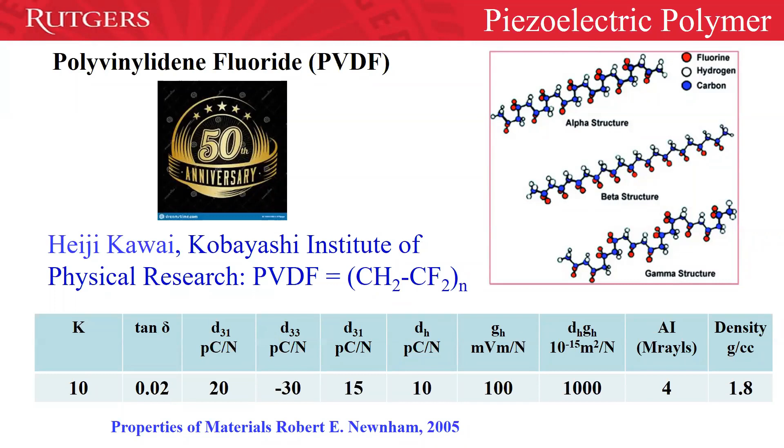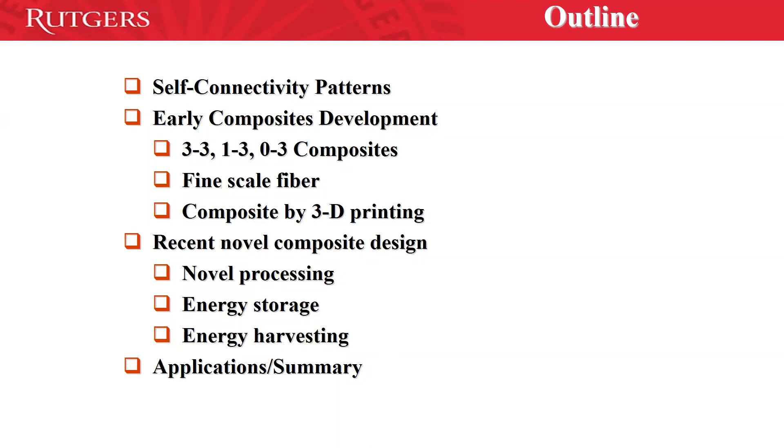I will talk a little bit about the early 3-3, 1-3, 0-3 connectivity composites, then move to the fine scale fiber composites. Then I'll touch on different 3D printing processes worked on for piezoelectric composites. And recently, composites became a major focal point for many applications including energy storage, energy harvesting, and capacitors, with a lot of novel processing now making composites.

First, I would like to acknowledge Professor Newnham and Professor Cross, as well as Professor Walter Schultz, and their leadership on piezoelectric composites, idea, and connectivity patterns. Walter Schultz is an ongoing collaborator with us doing characterization, setting up all the hydrostatic measurement and piezoelectric coefficient evaluation.

I would also like to acknowledge Dr. Robert Pohanka and Dr. Wally Smith of ONR. Probably Bob Pohanka is not there anymore. They not only supported Penn State MRL ferroelectrics for many years, from composites to single crystals, but also supported people like me and many other colleagues, not only in the US but also in other parts of the world, on development of piezoelectric ceramic polymer composites and single crystals.

It is noticeable to acknowledge the contribution of Professor Kiyoshi Okazaki from Japan. He and Professor Cross did a tremendous job organizing the US-Japan dielectric and ferroelectric meeting, which is still going on every other year, and is only by invitation.

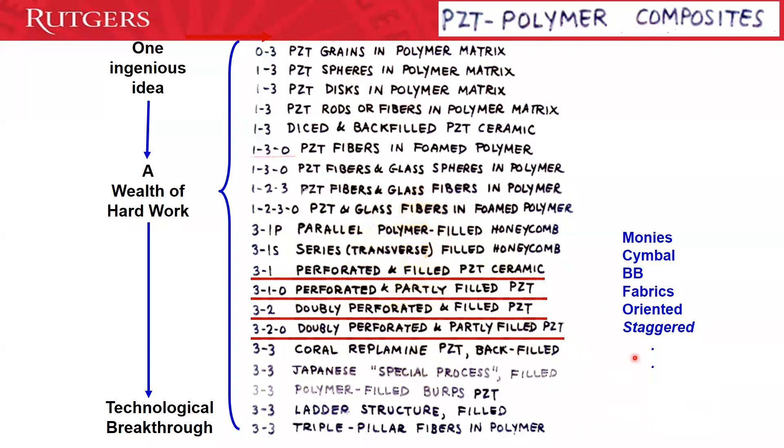These are the old composites. Later it comes to moonies and then cymbals and so on, which I'll touch on some of these very briefly. This is a schematic drawing of many composites developed around the world, and this is from one of my review articles.

So here is the PVDF - we call PVDF a composite as well. And then here is the 0-3 composite. The lower part composite you see here is developed by what we called at that time layered manufacturing or solid freeform fabrication. Now we call it 3D printing.

Let me just historically, for the importance of this type of composites, start with 0-3 composites. After Kawai's development of PVDF polymer, there were a couple of activities on making composite in Japan based on the PVDF. But the main point came from Harrison at Honeywell on making PZT polymer composites.

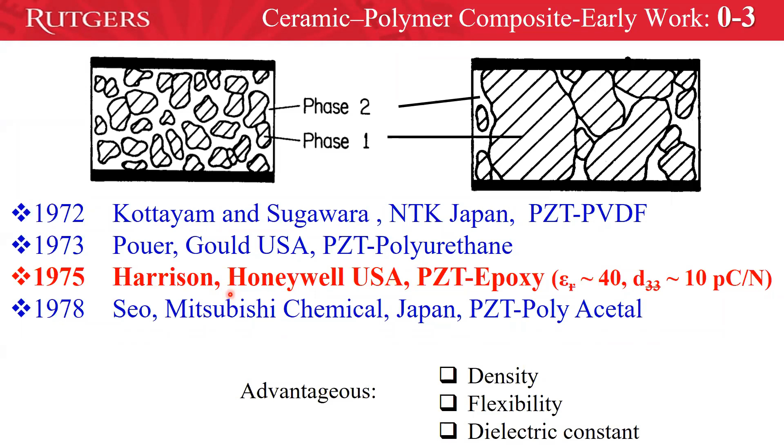These composites showed decent properties, but it became really a major point for moving the piezoelectric composite research at Penn State. I remember very well Harrison, when he was a part of the industrial representative to ferroelectric at MRL. He was a very well distinguished individual and knowledgeable.

So from there, I am going to show a little bit busy overheads, but historically, this is the first composite reported at Penn State. It's called replamine form, or replication process. This is Doyle Skinner's work. He started about maybe '76 and finished thesis in '79 or '78.

But my memory says that he defended his thesis, but he never submitted his graduation. And so he stayed like that, working in a major lab in the Columbus area.

Tom Shrout and Rittenmyer came with another composite called BURPS, burning plastic spheres, that's the abbreviation. Then a couple of 3-3 composites from Japan, porous or ladders. And then most of our reliable results came from evaluation of these composites at Orlando Navy Lab by Dr. Robert Ting.

He was a very nice, knowledgeable person. He evaluated most of the composites, collaborating with Penn State as well as supported by ONR. So this is a typical Gh coefficient of the 3,3 composite versus pressure.

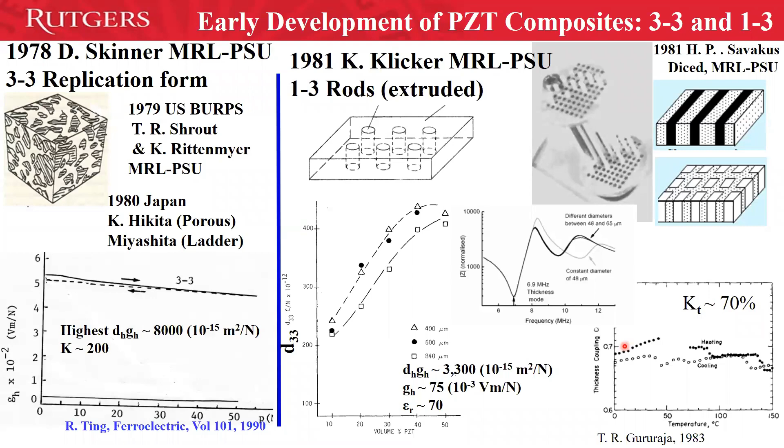This is my graduate work. When I started doing research with Professor Newnham, who was an outstanding scientist, researcher, leader, idea maker, and advisor, he handed out a paper to me and said, make a PZT sphere.

And then from this PZT sphere, make a composite, and let's see how the property looks like. The result came out very useful. We published a paper, but it wasn't that I was looking for something dramatic. So I was always thinking, okay, how can I make the inverse of the PZT sphere?

And so I came up with this type of composite. This is the patent - I believe this is the second patent for the Ferroelectric Group at MRL. The first one was the 1,3 composite by Klicker. And so this one is called perforated.

We can have this one in 1,3, 2,2, or 3,1, 3,2 connectivity. Less pressure sensitive, but very high DH and very high GH - the product of DH times GH is 15,000. This is the overhead Professor Newnham presented at the 1983 ONR review meeting of the program.

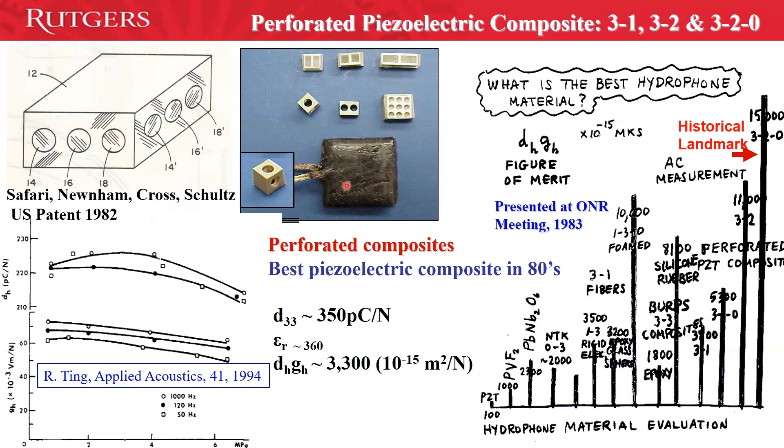And so for a time, we were proud that we had an outstanding composite. This is nine elements packed together by Celanese Incorporated, New Jersey at that time, Morristown, New Jersey, based on these 3,2 composites.

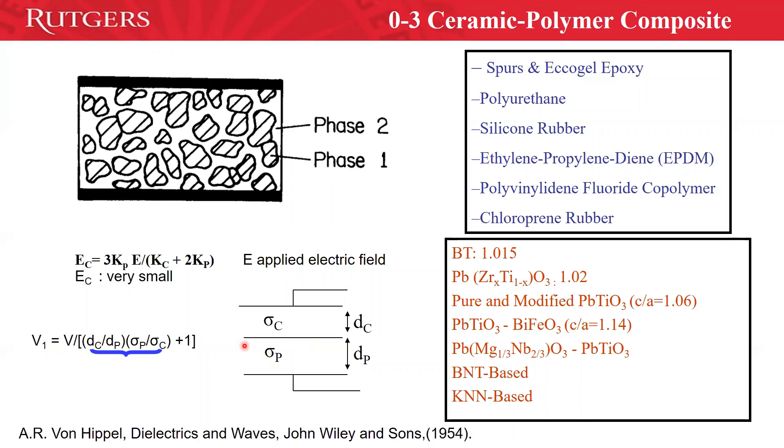So in 1982, Hiroshi Banno put a bombshell in the community. He introduced several different types of composites. These composites are 0-3 composites made by lead titanate particles. We believe he made them by chemical processing with controlled particle size, and sometimes in the composite he mixed different particle sizes. Finally, he announced a composite with d times g in the range between 2,500 to even 3,000 or more.

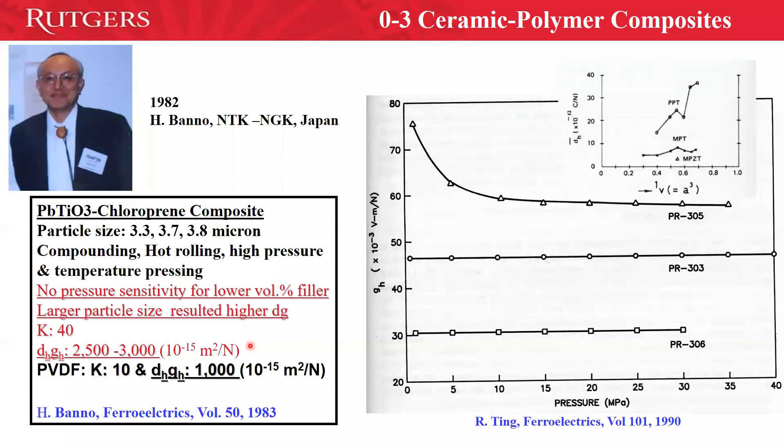That was really a breakthrough, comparing with the old 0-3 composite of PZT polymer, or even comparing with the PVDF properties. So from that time, the majority of the effort at Penn State was on making 0-3 composites. What you see here is a list of many 0-3 composites made by different individuals with different filler material, different powder, and different ceramic processing.

I believe the most significant here is starting to use lead titanate bismuth ferrite. Jenny Giniewicz, the late Jenny Giniewicz, very young and nice lady, died early. She was a professor at Indiana University of Pennsylvania, and she worked on this composition. I should say I had involvement in all these composites, either when I was at Penn State or later leading at Rutgers University.

The second composite, which three of us, Gururaja, Arvind Halliyal, and myself, developed during our postdoctoral research period, was PZN-PT ceramic, PZN-PT single crystal particle in the polymer composite. This composite gave properties similar to the single crystal.

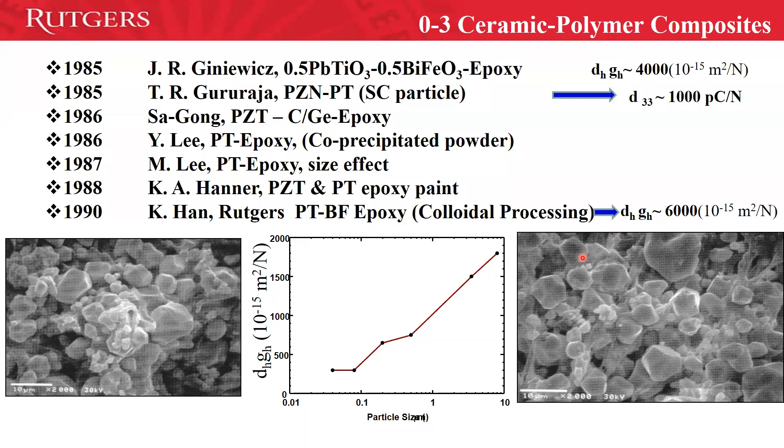So let's look at 2-2 composites. Again, I wondered why Penn State didn't apply for a patent on that one. So we got a special patent on making 2-2 composites by lamination of the tape, and we made either 2-2 or 2-0-2 composites, as well as 1-2, 1-3, 1-0-3 composites.

We utilized meters of these composites in the road, at a corner of the road at Rutgers University, as a weigh-in-motion sensor, working with faculty from civil engineering. We looked at the loading and unloading response as a vehicle was arriving, and wanted to see how these composites responded. The composites responded positively, with a little delayed response, but followed the load and unload cycle, and the voltage sensitivity was really good at that time. This was a candidate replacement for fiber optic sensors for weigh-in-motion.

In the early or late '80s, Plessey came out with a composite, and this was very interesting also. The result I am showing here is from Bob Ting, and this composite was a very large area panel. We believe this was diced, either 1-3, probably, or 2-3, or 2-2, and the d times g of these composites was about 20,000.

For about a decade at Rutgers University, graduating maybe 5 or 6 graduate students, we worked on fine scale fiber composite. This area became very interesting because we wanted a smart piezoelectric composite touch sensor, even for keyboards. ONR supported this work as well.

First we started making this by a relic process, taking a fabric—this could be carbon fabric or cotton fabric—and then immersing it in a sol-gel solution of PZT. After careful drying, we impregnated it with polymer and made a composite. This is really fine scale, and the properties were great.

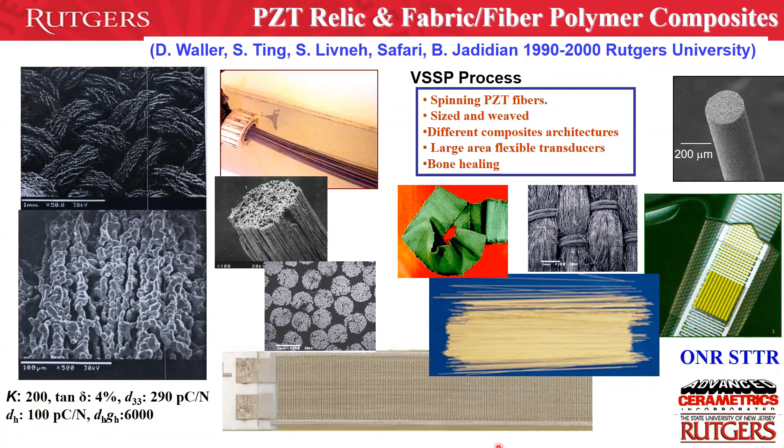Later, ONR helped us put together a STTR proposal with Advanced Cerametrics Incorporated in New Jersey, and we developed PZT fiber continuously by the VSSP process. Later we made a variety of composites based on these fibers, as well as the bimorph, as you see here. That period was very good for PZT fabric composite, resulting in mass production of PZT fiber as well as making these 1-3 type composites as bimorphs for either structural protection or crack investigation.

MSI, the late Les Bowen, my mentor as a postdoc—I was his postdoc—they came up with a variety of designs of PZT ceramic, including the 1-3 tube, and this is part of our work also, made by injection molding. So that was in terms of the composites and fiber.

Then it comes to poling. It was Gururaja who first made continuous poling of these PZT fibers, just taking a single PZT fiber and drawing it between two electrodes in an oil bath to pole them continuously. I looked at the picture—it was not clear enough to put it here, so I wanted to note his work.

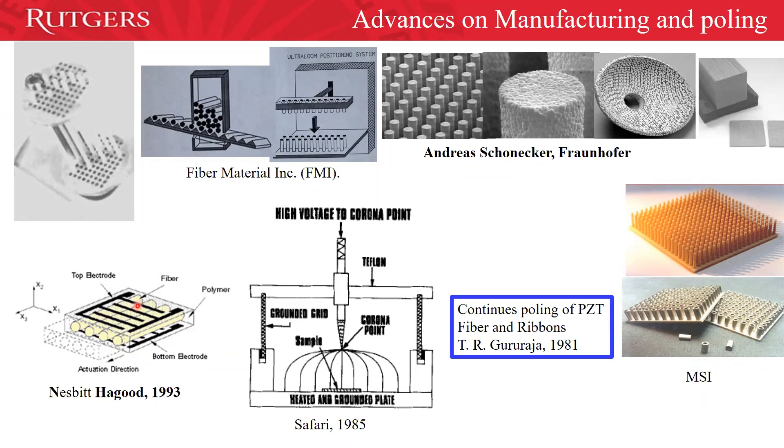So in terms of those, those are low frequency. In terms of high frequency, there is a lot of PZT and recently some other ceramic polymer composites. I am noting a few different contributions. This is from Jinfeng Li and Qifa Zhou—Jinfeng Li from Tsinghua, Qifa from USC. They made KNN-based material by dicing and making composites. This is about a 32 megahertz center frequency, with a very nice bandwidth—about 70% minus 6 dB bandwidth.

Then some other scientists around the world made these composites: KNN-LT ceramic polymer composites, and BNT single crystals and BNT fiber composites, which gave really encouraging results overall for the development of ceramic polymer composites.

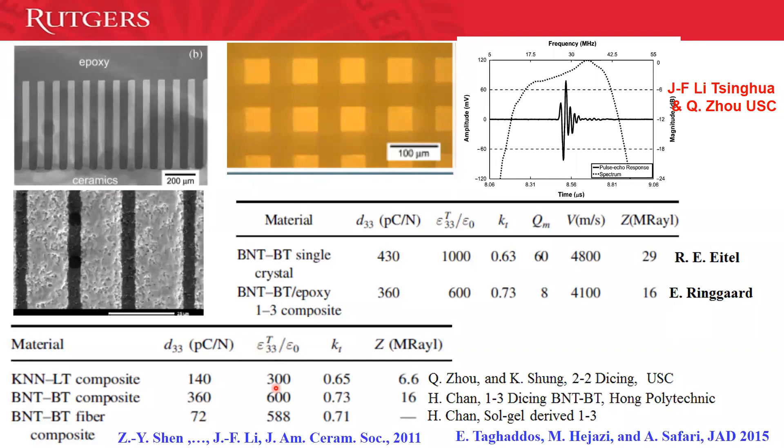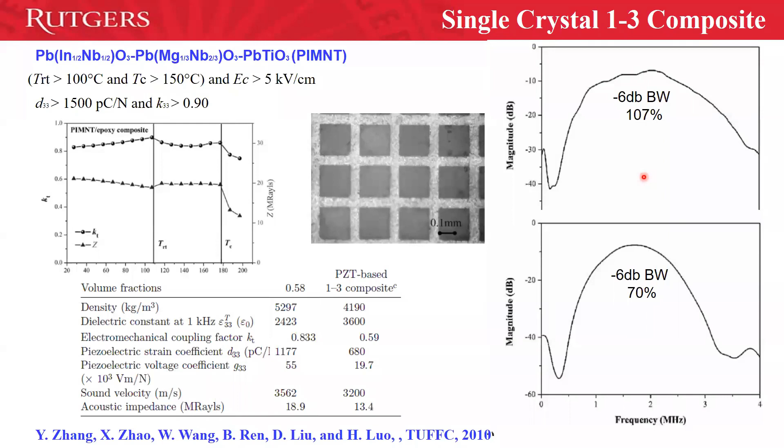This is another work—single crystal made with Haosu Luo and his group, using lead indium niobate, lead magnesium niobate, lead titanate single crystal 1-3 type composites. Here is the single crystal, and these are the polymer. The bandwidth of these composites is about 107—this is minus 6 dB bandwidth. That was another encouragement, really, for using these in medical ultrasound applications.

So for about two decades, we worked on 3D printing at Rutgers. We had a major program supported by DARPA, ONR, New Jersey Commission on Science and Technology, and a few industries. We didn't call it 3D printing then—we called it layered manufacturing, or solid freeform fabrication—but now it's fancy to call it 3D printing, which is really, now it is printing.

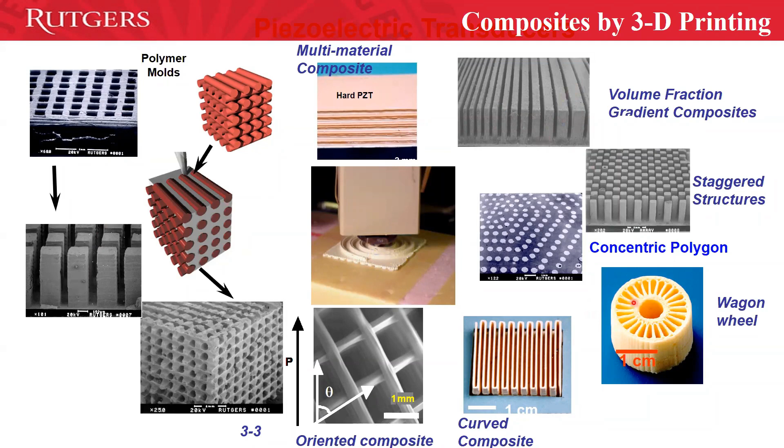So I have two works here to show you.

One is an incredible composite by Michael Haun from the 80s. What he did was align PZT in the poling direction, but incorporate glass fiber in the transverse direction, possibly with foamed polymer also. The purpose was eliminating the D31 coefficient, since D31 in the PZT is negative and basically kills DH. He successfully achieved this by designing and producing these composites. This is a patent from the late 80s to MRL.

And what we did with 3D printing, we made a shape where the fiber or ladder makes 45 degrees with each other. We polarized these along the fiber, trying to bring contribution of D15 as well as eliminating D31 and D32. The result is a composite with DHGH about 50,000 and DH close to 550. I believe this was an outstanding design. Of course, this hasn't gone to mass production yet, but there is no match for these piezoelectric composites.

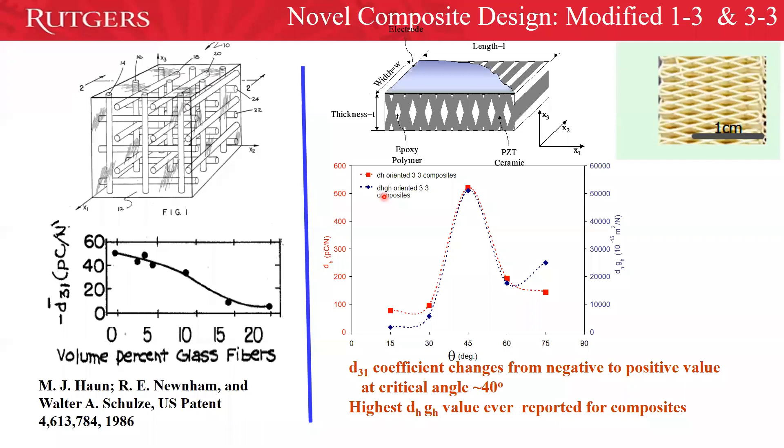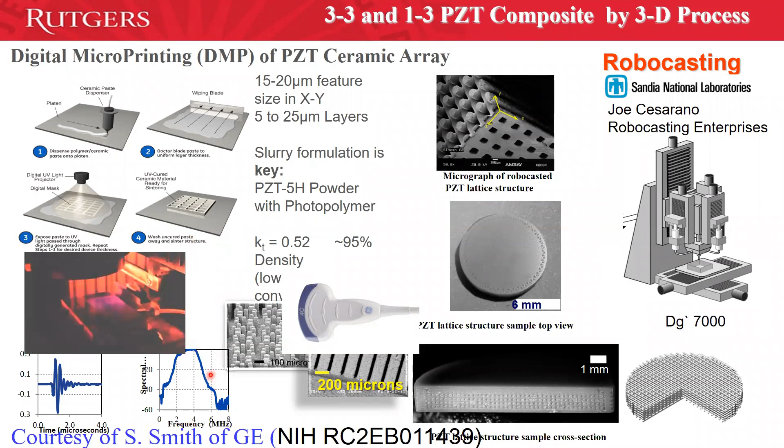Here are two different 3D printing processes. One is a contribution from GE, courtesy of Scott Smith. The other is a contribution from Joe Cesarano - this is the old overhead I had from him. Joe is president of Robocasting Enterprises, a process that started from Sandia National Lab. Now it's a major company in Albuquerque, New Mexico, making a variety of porous ceramics by 3D printing, robocasting. This is a patented process by GE - they make 1,3 composites, and made a probe for high frequency medical ultrasound. This is the result of that probe. So 3D printing works, bringing new technologies back to making piezoelectric composites.

One of the major composites, where Professor Newnham's idea became reality, is the Moonie type of composite. This is PZT ceramic with shaped metal glued in the form of the Moonie. This composite was a point of attention for many years, and still is for many researchers, as it has many applications as a sensor and is also a good actuator.

So we had some contribution on these composites - this is a composite of PMNPT ceramic, a piezoelectric relaxor, with two metal electrodes made by 3D printing. This shows the cross section of these composites. Bimorph designs are now being used a lot in energy harvesting and possibly energy storage applications.

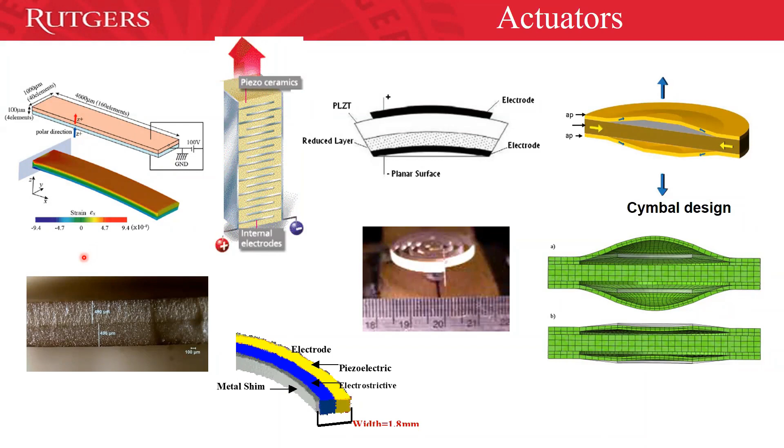So I want to move in a new direction here. This is a really novel composite made by a group in Korea, published in the Journal of American Ceramic Society. This is a multi-layer composite - PZT is multi-layer, and the polymer shows 2-connectivity here. This is a brilliant idea, and this composite shows D33 about 1200, and due to the design, D31 and D32 are negative, giving a very impressive DHGH.

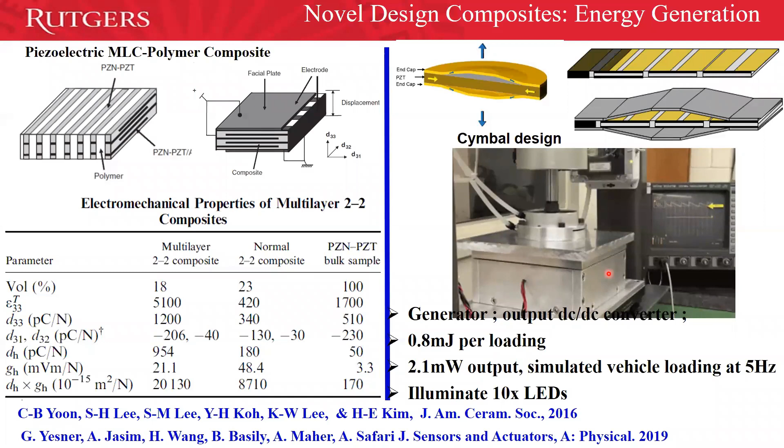We took Professor Newnham's Moonie composite and designed it in bridge mode. Rather than having a simple ceramic disc, we segmented the ceramic, polarized and connected it so it works like a multi-layer ceramic. This composite gives an outstanding effective D33 of about 19,000, and we developed a prototype 64-element energy harvester. Here is one piece of equipment - we put together a system that simulates a car driving, applying pressure at frequency, and looking at the voltage generated. This illuminates over 10 LEDs.

So that was basically one of the recent works, the last two. And this is really another outstanding process for developing highly dense composites, as well as sintering ceramic at low temperature. Last week, Professor Clive Randall gave a virtual presentation seminar to our graduate program, talking about their breakthrough in developing the cold sintering process for making 95% dense material.

For example, barium titanate with only 3% polymer, basically modifying the grain boundaries. Schematically, we show the process on the right hand side. Here is 2.5% polymer, then it goes to 5%. At 2.5% it's a little bit lossy material, but at 5% or 10% you get about 1,000 permittivity, and the density goes from about 95% to about 98%.

So this is a review - there are many review articles on this topic, and this is the direction for making highly loaded composites, possibly through the cold sintering process.

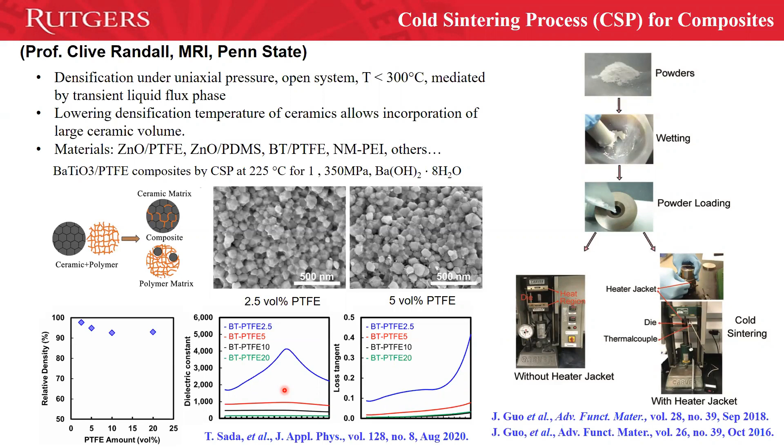Again, this is another outstanding paper from Penn State MSc department, on gamma alumina composites. They look at alumina, titanium, and silicon. The gamma alumina is a kind of anisotropic particle, like platelet or flake geometry, highly loaded. The idea is to match dielectric properties of the filler material with the dielectric properties of the polymer matrix, which is PVDF.

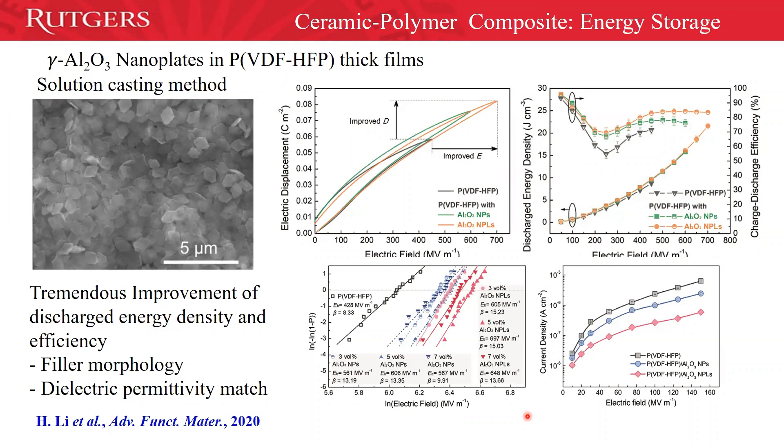Here the filler is alumina nanoparticle, alumina nanoplate, and then this is the PVDF property itself. By going to the alumina nanoplate, you can improve electric field strength as well as electric displacement quite impressively, from pure PVDF to a very highly loaded gamma aluminum oxide. In the same way, discharge energy density, output, and current density became incredible. Current density is low, and discharge energy density and efficiency became really outstanding.

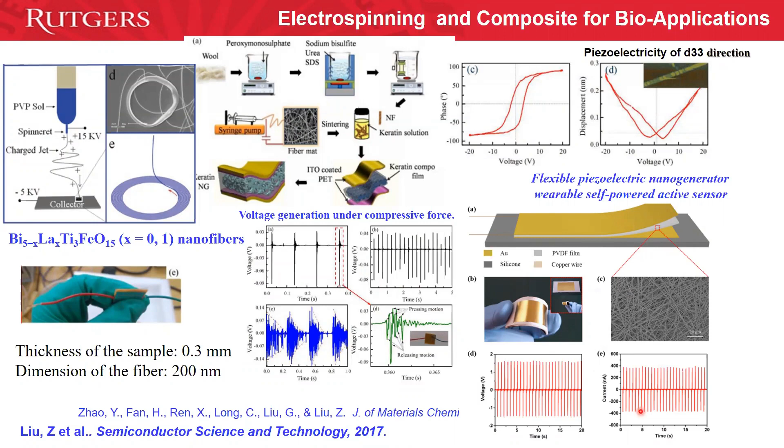This is another example of an electrospun piezoelectric composite. This is an electrospun mat with a gold electrode on a flexible substrate for self-powered energy generation for a variety of applications. We are talking about voice recognition, and possibly looking at blood pressure monitoring and so on.

So finally, in all those things, surface modification of the nanofiber became very important. Surface modification, for example, putting acetic acid to increase loading, or for example putting another coating having a core-shell structure.

But this is probably my last overhead before the summary. Briefly, I am talking about flexoelectric composite. Professor Cross came up with this idea in the 80s, asking who could make pyramid-type composites, since sharper features really concentrate static stress into the strain gradient and create a lot of polarization in the composite.

This is from a recent publication paper. Here is a BST composite, tape cast, then with some metal added, and by applying stress you generate about over 1,000 picocoulomb per Newton D33. I recall from the paper that below TC, the numbers are even higher.

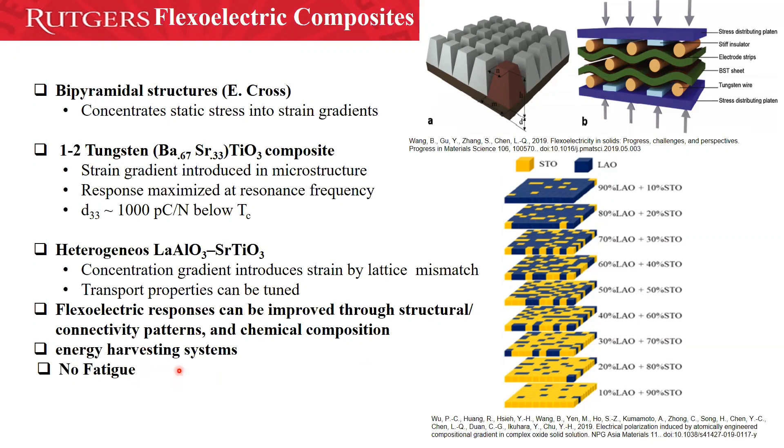This is another novel design, a thin film really making a compositional gradient. In my recollection, this is made by a PLD process, and every few layers you change the composition. This works very fine in the macro scale to develop nanoscale flexoelectric thin film, which should give outstanding properties. A major advantage of this one is no fatigue, and it could be used for energy harvesting as well.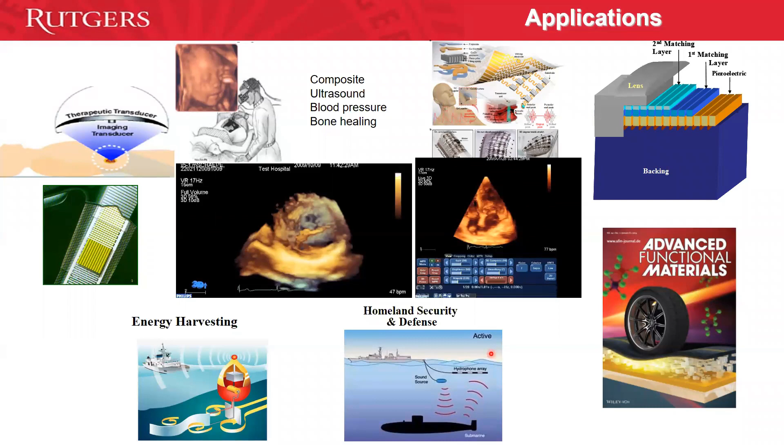This probe, the yellowish part, is diced. Now it is single crystal, used to be ceramic. Then there are a few different types of polymer or composite matching layer and lens, and composite backing layer. So the whole probe is a composite, consisting of many, many elements.